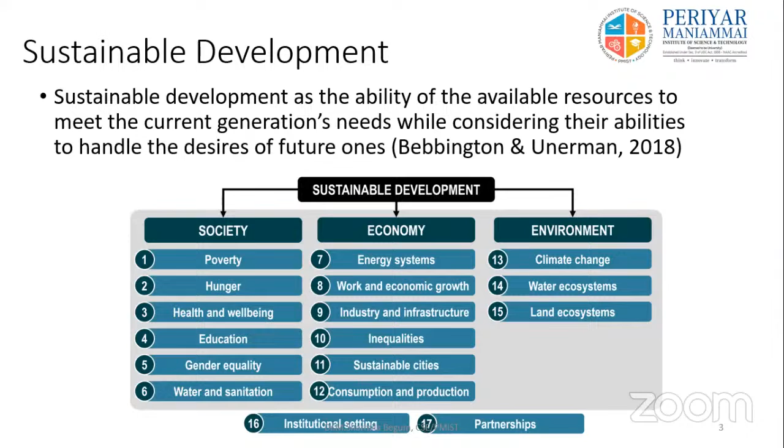So how can the computer science field be utilized in climate change, water ecosystems, land ecosystems, and how can we achieve economic growth and also improve society.

Computational sustainability - computing for a better world and sustainable future - we are formulating for these three needs: environmental, economic, and societal.

For the sustainable future, computer and information scientists are playing a role in good sustainability. Such computational expertise is needed - recently artificial intelligence, big data, machine learning, and various methodologies have turned into the IT, green IT environment.

Now the world's evolution, Industry 4.0, has turned into this. So we are now challenging ourselves to move toward the desired future using computer techniques. Thus, computational sustainability aims to identify, formalize, and provide solutions to computational problems, balancing societal needs with environmental and economic futures.

The major areas of computing where we can attain sustainability: the first is how computer architecture meets this need. Now we are moving into large data centers, like cloud environments, using recyclable components.

In the computing environment, there are various generations - now next generation 4G networks have come, and we are also using older access networks like local area networks, and now Wi-Fi.

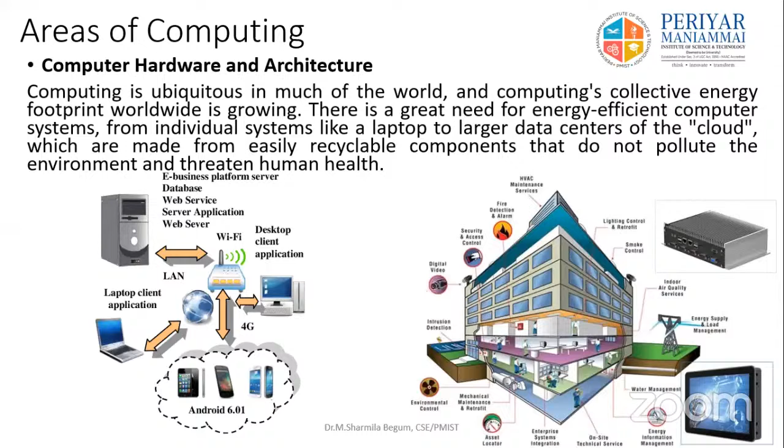The next area is robotics and sensors. This is a major area in computing sustainability we can address. Nowadays sensors play a major role, like Google Maps - geographical information systems we use for tracking and information.

Using that, all the information is retrieved, and sensors play major roles like monitoring civil infrastructures such as bridges and power grids, with sensors in a wide variety based on vision and audio. These sensing abilities help us respond to several disasters.

Nowadays robotics plays a major role. The robotic concept is nothing but how we can replicate the human brain system.

By replicating the human brain system, we will replace all manual work by the robotic concept. This is a major field in Industry 4.0. For this process, we have to study about sensors and remote sensing. We can place sensors and retrieve data through Internet of Things, that is IoT, and we can pull all the data into servers with a processing station. Collecting all this data, we will perform some analyzing.

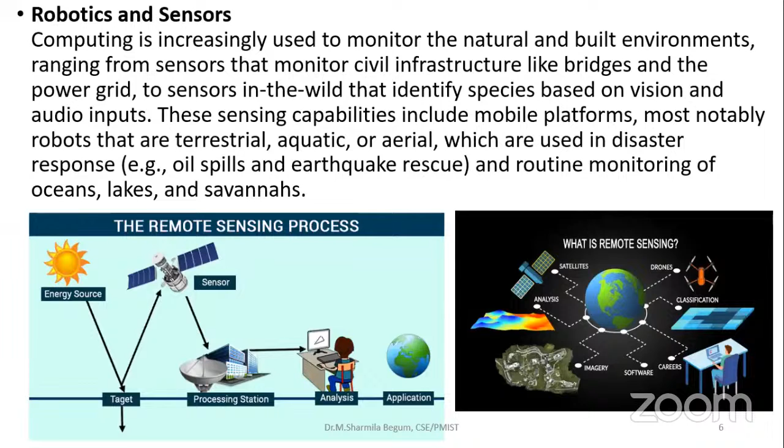The next area of computing is the cyber physical systems of recent Industry 4.0, CPS. We will perform computing technologies by embedding these cyber physical systems into various processes like inbuilt car systems, highway buildings, and also we can build smart homes or smart malls. This process is to majorly improve energy efficiency and also for safety purposes.

CPS will be helpful to monitor all the processes and data we have handled, and also it will intimate immediately to the users. Otherwise, the admin will get the response immediately by using the cyber physical systems. Here also human-built systems such as cars, airplanes, and robotic systems are used.

Some intelligent systems like artificial intelligence play a major role. As I told you, it will replicate the human brain, and we can use this artificial intelligence concept for sustainable development, reserving water usage with optimization. Intelligent systems use several machine learning algorithms, and with supporting algorithms we will perform and predict using intelligent software.

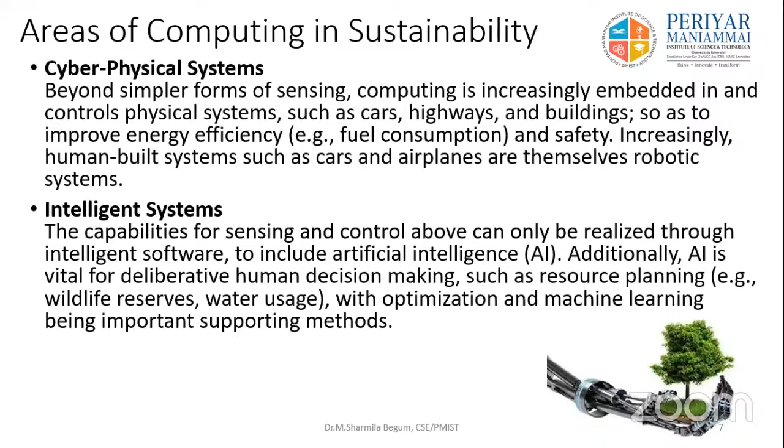So this is the main idea of cyber physical systems. Systematically, we are touching all kinds of sustainable development like social systems, enterprise systems, and biological systems. CPS plays a major role.

In cyber physical systems, it will be able to develop mechanical, optical, or electrical systems, and by using this system we can cover all the sustainability in the community of education, healthcare, and government. We can also perform several models for business, and the business model can be used for analytics and prediction for the future.

In several healthcare systems also the cyber physical system is implemented. So these are the industrial revolutions, and CPS plays a major area of computing sustainability.

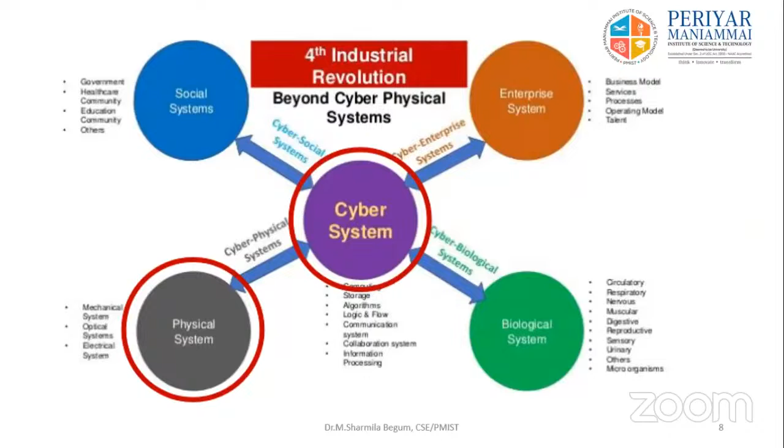The next field in computing that we are all using nowadays is social computing and networking. In this discipline, we are performing several e-commerce activities and online recycling of cooperatives, and this is ecologically sustainable for the environment.

We are minimizing our manpower and paperwork, and we are using several social media platforms, performing video lectures and video conferencing through social media computing, and also using several networking concepts to connect all the people around the world.

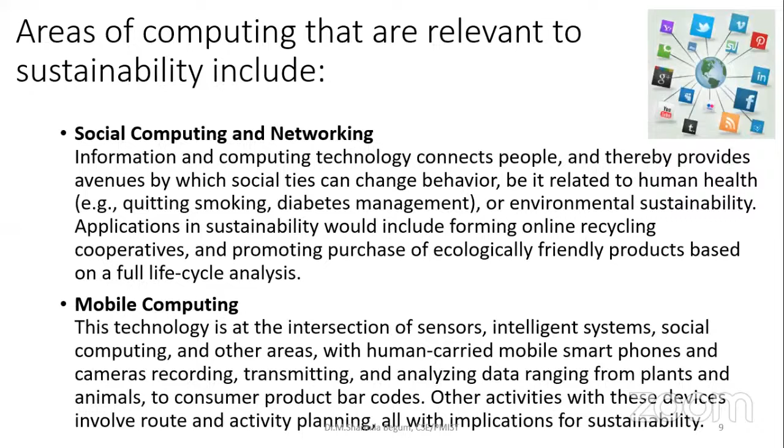The next step to develop sustainability is mobile computing, where we are recording information, transmitting our data, analyzing the data, and using it for sustainable products. Also, nowadays consumer product barcodes are implemented using the mobile computing concept. This all implicates sustainable development.

So these are all the various areas where we can touch sustainability development in the computing field, using the concepts of cloud, social networking, social computing and networking, and mainly the fields of artificial intelligence and machine learning. The next sustainable development is in the energy and environment factor.

These facilities allow us to apply products which increase and decrease environmental impacts. That is, we can apply computer technologies to determine how we can save for future desired needs.

So nowadays we are using technology to eliminate the need of paper, conserving our energy, and enabling several products. This will help determine and minimize the waste by using these strategies of computing technologies.

Nowadays we have options by using Google Docs, that is Google Document Viewer, and we are creating documents in place, and we are sharing the documents in any place.

Receive the document, and they will edit the document. The entire community will view the data placed in Google. So this Google Docs and video conference aspect, and paperless works, are the main factors in the computing field.

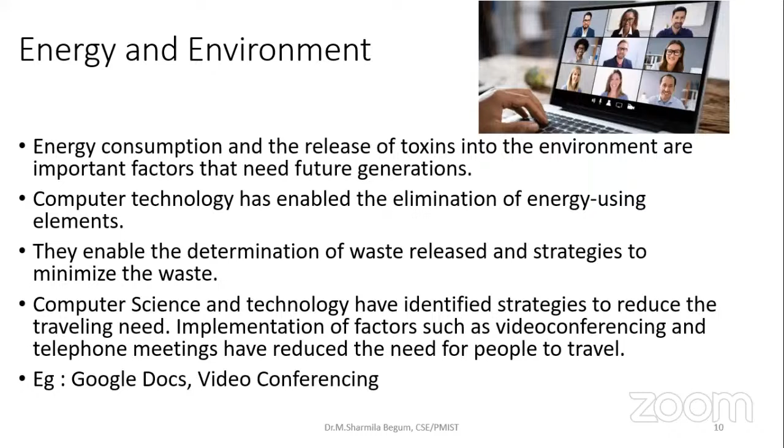So these are all the main environment factors that are needed for future generations.

The role of ICT is playing out in various forums like marketing, education, health, and environmental sustainability.

In the marketing field, by applying classification or training algorithms, we are classifying how things will be tomorrow. This will increase the accessing of market information. In terms of education, we are providing availability of quality educational materials and several resources through ICTs.

In terms of healthcare management systems, we are providing e-health through various ICT tools, enhancing the delivery of basic needs and services through ICT tools. Environmental sustainability is also playing a major role by using information technology.

So the next one I'm focusing on here is IT for green. This means we are replacing non-green services with green services. This process can be called computing for sustainability.

Computer science will benefit the environment with less carbon control, and also better consumption of resources like fuel, and we can give better agricultural output. So we are producing that — how we can give services with green services is the IT for green technologies.

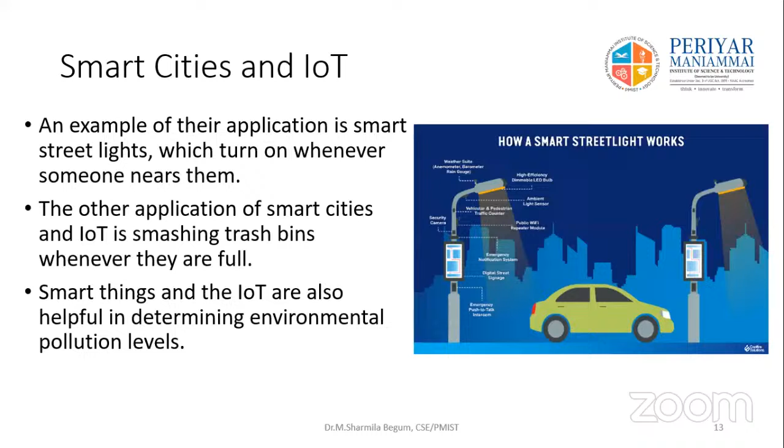So this is the major field, Industry revolution 4.0. We are able to store and retrieve the data with a less polluted environment.

So this computational sustainability we can achieve by using IoT, performing several computational strategies like visualizing the data, learning from data, and predicting the data for large amounts of information.

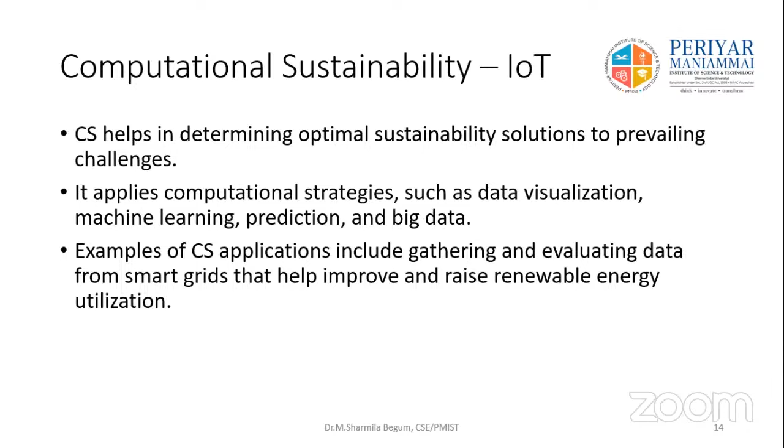And we can determine the solution.

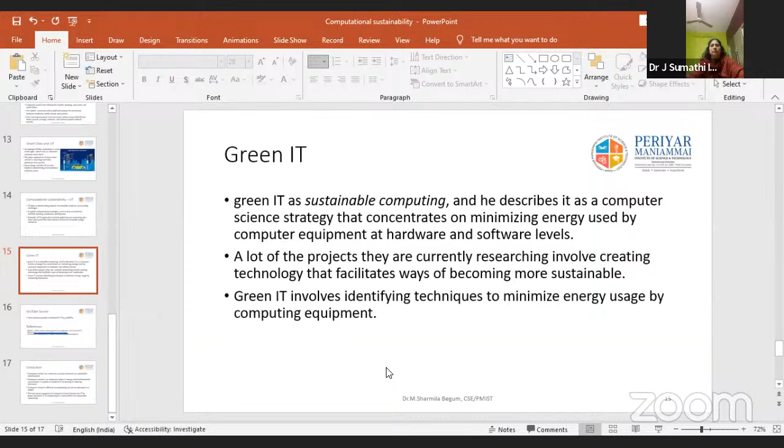We'll share this one through the chat box, Santosh. We will see it later.

So by using computing techniques like green IT, artificial intelligence, robotics, and remote sensing concepts, we can achieve a number of positive outcomes in sustainable development. So this will be important, sir.

Please continue with a louder voice. Green IT is an important player in energy and environmental conservation, and also has numerous positive outcomes on sustainable development. So by using green IT, computing will be used for sustainability and sustainable computing.

And combining non-green services with green services, green IT involves identifying techniques to minimize energy usage through computing.

These are all several fields we can use through the Industry 4.0 revolution. So I have pointed out a lot of techniques like teleconferencing, artificial intelligence, machine learning, robotics, and green IT, combining non-green services with green services, along with machine learning algorithms and remote sensing processes in SaaS.

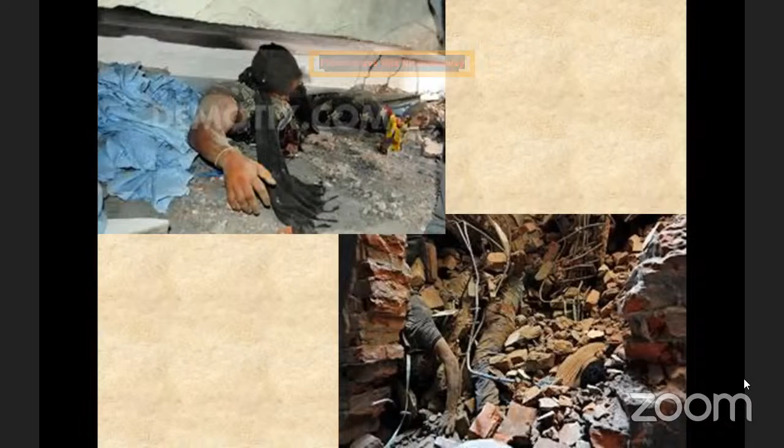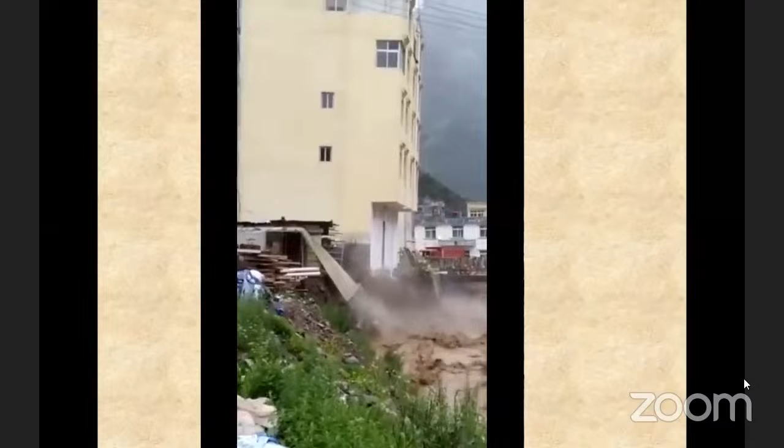See, some hands are towards us only, so fingers point back at us. Everywhere we have the local planning authority, DTCP approval, everything in place, but are we following properly? Particularly on the roadside, the road is 23 or 30 feet wide, but on both sides, houses are constructed with ramps of at least 5 or 6 feet. In a 23 feet road, if both sides have a 5 feet ramp, we finally get only 13 feet. So who is to blame, the approving authority or whoever is constructing the building?

These are some of the videos. This image was taken in May, June, July, August, September, but after January, after Pongal, this is the condition. So in one period we are suffering due to flood, and in another part of the year we are suffering due to drought. So in both ways we are suffering.

This is the big video, next one. Every year we are facing various types of cyclones. We are beautifully naming the cyclone, like naming our child. But whether we have planned to prevent people, infrastructure, or animals from the cyclone, every year we only get remedy from the government after the cyclone. We are not following any rules.

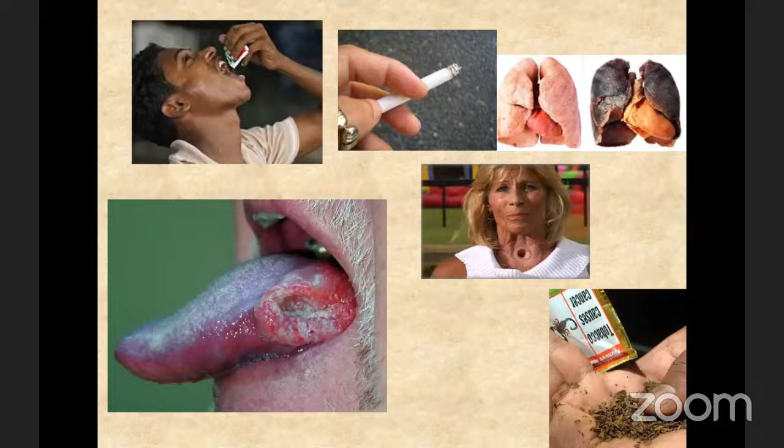We are not thinking, not bothering about it, but we are always blaming someone. Everyone, particularly in burning plastic, we have to educate people not to burn plastic or any solid waste material, because burning solid waste will develop particulate matter. Particulate matter 2.5, 10, everything. This morning our Santhosh addressed various aspects, but regarding the effect of particulate matter 2.5 and 10, that is why we wear masks.

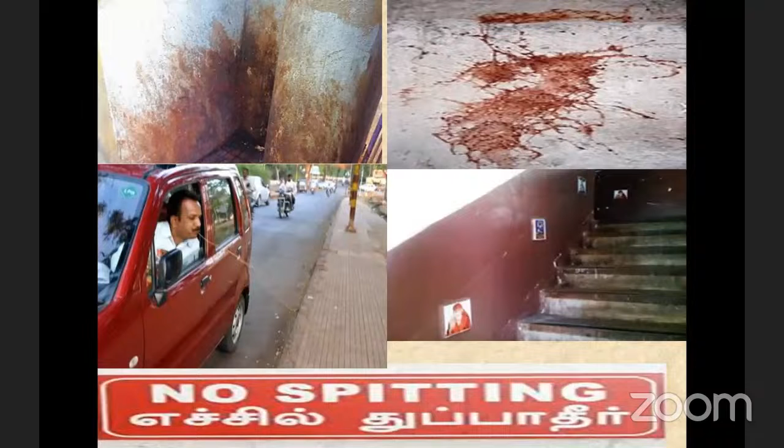So these are images taken from our bus stand, Tanjavur bus stand, a leading theater in old Tanjavur bus stand, another staircase in the shopping mall. This one was collected from a person spitting near the platform, taken from the website. But all three images were taken from our own soil, in Tanjavur, various places.

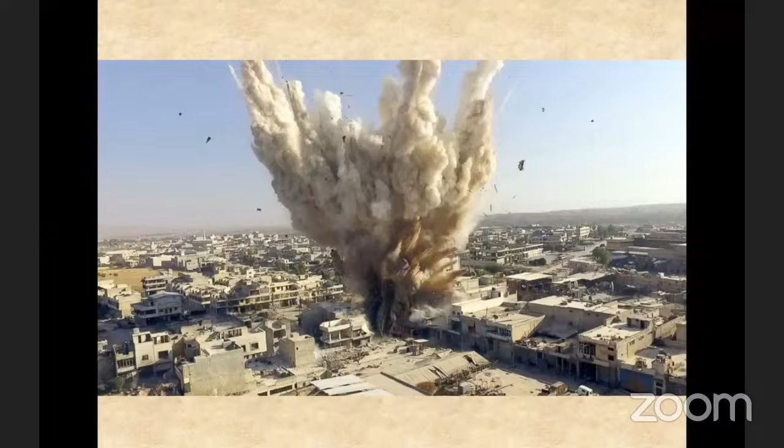Always the bike is invented to travel at the speed of 120 with 3 members sitting on the bike. Finally, we are traveling in the 108 ambulance towards the hospital. There is a pathetic condition everywhere we are missing. So this is a terrorism. Even in a civilized society, we are claiming that we are a civilized society.

Still, we have threats due to various weapons, and this is our Tamil Nadu, India, even Tanjavur - we are claiming this is an open defecation free district, open defecation free state, open defecation free India. But what is the original actual condition? Can you go walking in the early morning at 6 o'clock or 7 o'clock - everybody witnesses what is happening in and around. So these are the various questions I am raising, not only for you, also for me.

Finally, my answer - I have one small, very simple answer. Every citizen of India has to follow professional ethics, or simply ethics. If you follow the ethics, we can avoid everything. That is my question, my answer. But what about yours? I don't know. You please get the answer for yourself. So this is the next one.

Now we enter into the actual subject - that is sustainable construction and green certification. So why sustainable construction? Sustainability is everywhere, but particularly in construction, if you follow sustainability conditions, sustainability technology, or sustainable construction materials and methods with various details, definitely you can save.

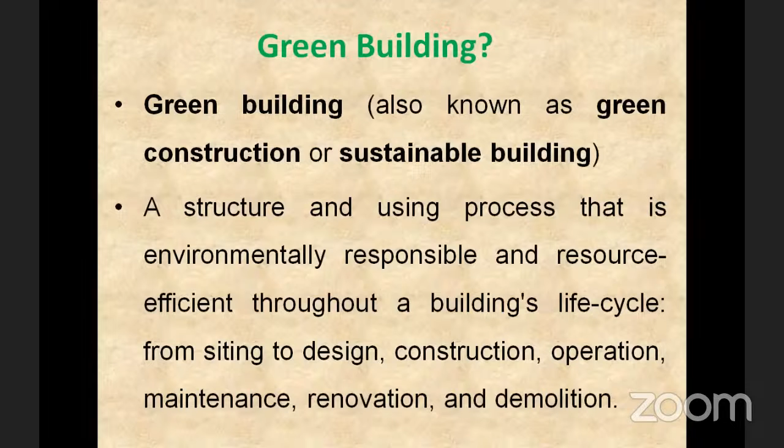So during the design, during the construction, during the operation, during the maintenance, renovation, demolition, that is the life cycle of the building. So during the life cycle of any building, it may be houses or bridges or roads or any multi-story shopping complexes or commercial buildings, anything we can follow.

So the green building concept in India, particularly almost 24 countries all over the world, they are following various norms, particularly the US Green Building Council. That is the foremost agency responsible for the green building concept. Following the US Green Building Council, we are having Indian Green Building Council, IGBC.

So in India we are following 2 types of green building rating systems. One is LEED India statement, LEED India rating system. It is governed by Confederation of Indian Industries under the Indian Green Building Council. Then GRIHA, that is the Green Rating for Integrated Habitat Assessment. The LEED India statement is for any building, but GRIHA is mostly used for any habitat or cluster formation, developed by TERI, controlled by CII. This is by TERI, that is Energy and Research Institute.

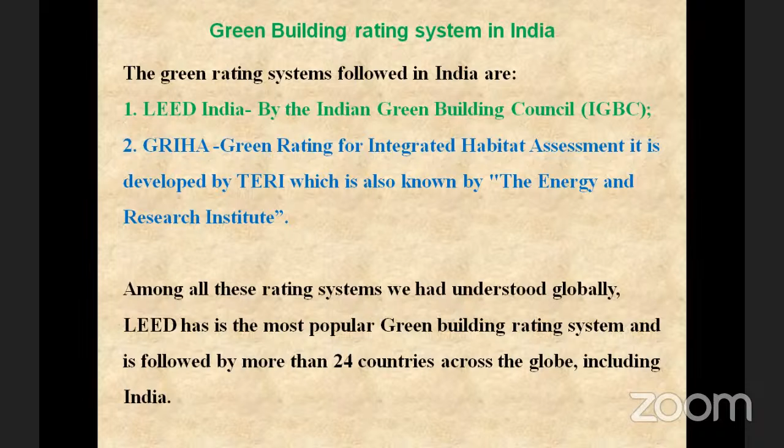So even though LEED or GRIHA, the concept or the content or technology or practice is almost the same. The green building rating system globally is now mandatory. In developed countries, every building is controlled by green building councils, particularly the rating system, the green building standards, particularly LEED. LEED means Leadership in Energy and Environmental Design.

So with a lot of parameters I am going to show, through this we are controlling the various environmental systems. Then green globes, model green home building guidelines, then build green, energy star, living building. So energy star and LEED are very famous everywhere. Compared to LEED, there is the energy star.

So if you go to a shopping place to purchase an AC or any electrical or electronic gadgets, immediately the seller says, this is our 3-star rated sir, this is 5-star rated sir, this is a single star rated. Even that has an inbuilt stabilizer, everything they are selling that.

Nowadays all electronic gadgets are coming with inbuilt inverter, but still our educated people are confused whether the inverted AC is useful or non-useful. But technically it is correct. The inbuilt inverter is guiding us for proper fluctuation of power and consumes less energy, less power, so we can save more energy, particularly electric power. So please always use star rated electrical or electronic gadgets.

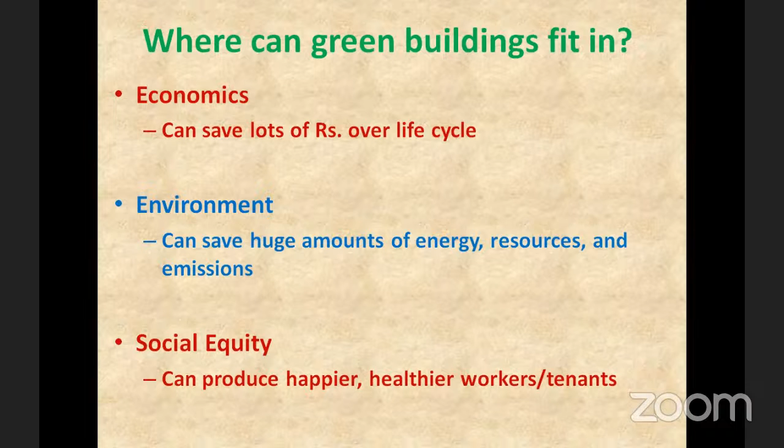Then social equity - we can produce socially, economically equalization at all levels, a healthier working system, working environment for workers and tenants. As I mentioned earlier, we can save 30% of the money or material or machinery or gadgets, whatever the name. Using passive and active energy and environment, we can save a lot, about 30%.

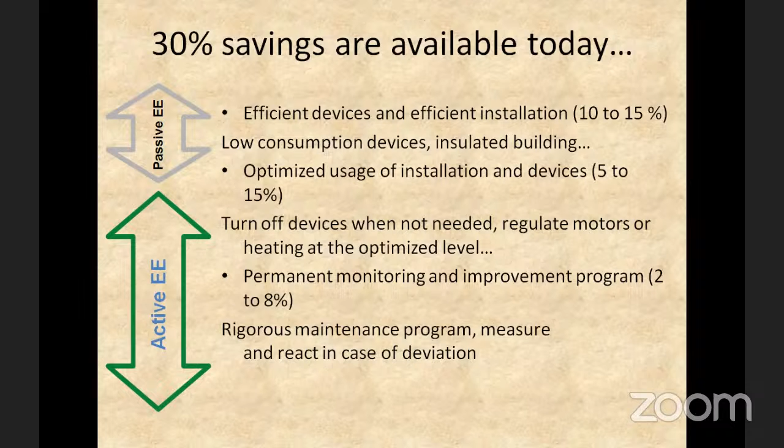That is the various ways, either directly or indirectly, we can save. That is very, very important. The 30% is the average; even maximum we can save 40%. That is very, very important. So what are the opportunities in saving? Energy infrastructure, information technology.

In the last session, Madam Sharmila addressed the various IT, ICT, and cyber security related sustainability concepts, but everything can be incorporated in buildings. Now for example, our Rameswaram properly constructed buildings with sensors and screens, with proper maintenance throughout the year - everything is now totally fixed with a lot of ICT gadgets. The government monitors the performance 24 hours, and if any defects occur, it is monitored by our government officers or CPWD people. That is the important role of ICT gadgets in a building.

That is called the intelligent energy efficient building.

So energy infrastructure means fixing during the design, during the construction, during the maintenance, we are following all the green building concept, using all the green building materials, construction technology, everything. Similarly, the building should be monitored or used by using ICT facilities. That is called the intelligent building.

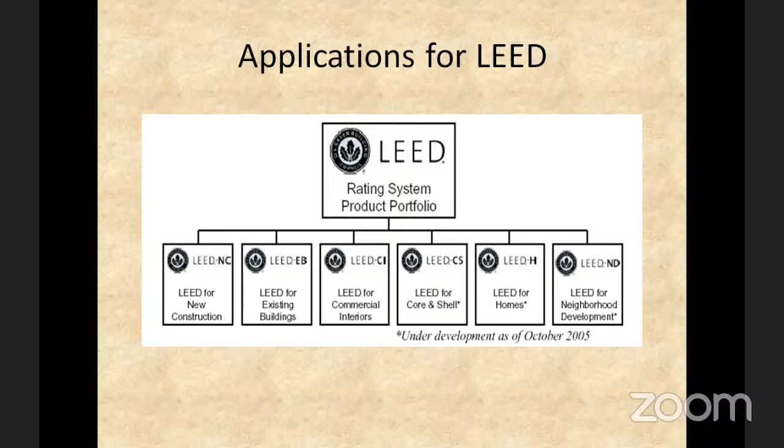So why is this needed? Already I am explaining - the built environment accounts for almost 40% of the global consumption of raw material only for construction. 37% of the primary energy is consumed by the construction industry. 68% of the electricity is consumed by the construction industry. 12% of the water, particularly potable water, is consumed by our construction industry. 40% of the waste stream, and 35% of the carbon dioxide emission, only from the construction industry.

See the quantum - after agriculture, the built infrastructure sector is a very big industry, consuming more energy and emitting more emissions. So it is very important that we follow the LEED standards or green building concept for infrastructure or buildings, because that is why the government is also very particular on standardizing building practices and regularizing the building construction norms.

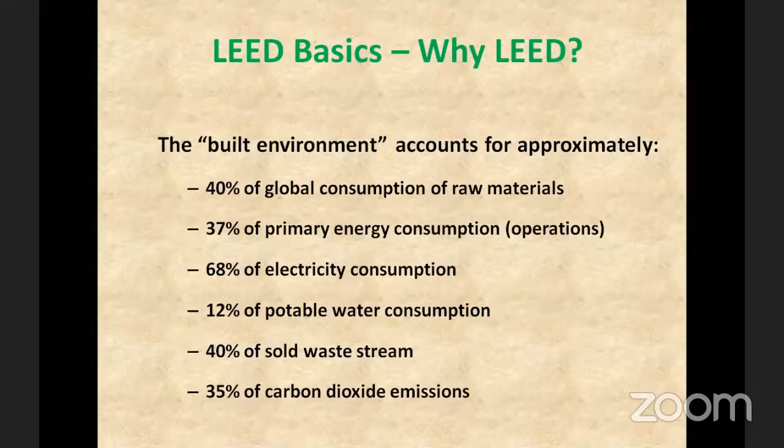Now day by day our local planning authority, or the town and country planning authority, they are modifying the rules and regulations for any approval. That is because this is the quantum of energy or pollution by the construction industry, next to our agricultural industry.

Then what is the need of LEED? To investigate the feasibility of building a cost-effective, sustainable home. Sustainability means not only emission reduction, but also increasing the comfortability for the living people. It is very important, that economical condition, economical sustainability.

So reduction of cost. Some of the people are there, low cost construction - please don't ask low cost construction. It is not low cost construction, it is cost effective construction. When the term low cost construction is misleading the people, they are thinking that by reducing the cost, we are reducing the strength of the building also.

Please change your mindset, everybody. Low cost construction, it is not the correct word. It's cost effective construction, cost effective sustainable construction. It is reducing the cost, not reducing the performance or strength of the building, any building. So I request all the participants hereafter use cost effective construction. Still people are using low cost construction, even our civil engineers also.

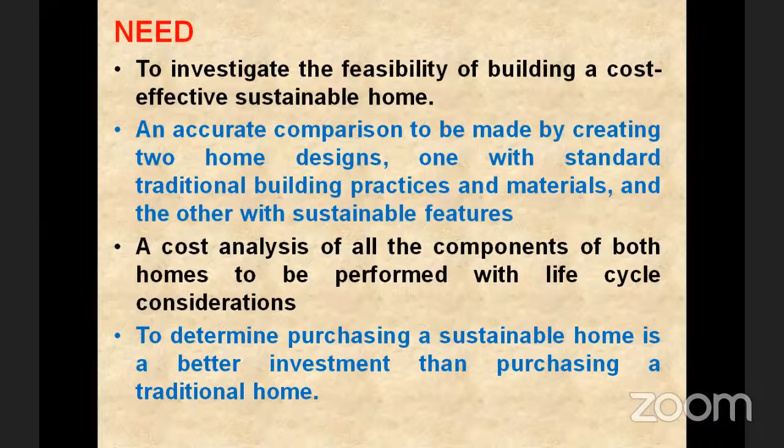Green buildings are becoming increasingly common for both residential and commercial structures. At one time, people considered the green building concept only for residential structures, but now the condition has totally changed. Most of the commercial buildings now go towards the sustainable concept, because they have to attract more people for working as well as for any commercial purpose. So they are also now going for green building rating.

Then there is high demand for green design from greater overall consciousness for the environment and sustainability. So now,

due to various calamities, pandemic or epidemic and various natural calamities, even man-made - I tell that mostly we are escaping by naming it a natural calamity. But my consideration is, all the calamities are made by human beings. Either flood or drought, it is only because of the mistake of human beings. But everything, so that is why

I'm always telling that everything is man-made calamities. There is no natural calamity. We are constructing buildings along the water course. During the flood, we are blaming the rain, or any government, or local body officers, office bearers. So it's the building causing any calamities.

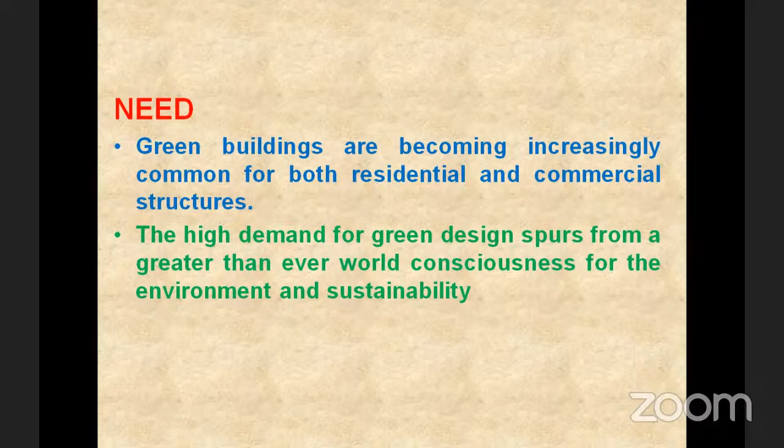So then why should you get LEED certification particularly for any building? If you get the LEED certification for your infrastructure, it contributes to a healthier work environment, higher productivity, and comfort for the workers and tenants. That is very, very important.

It will attract more workers - not only more workers, good workers, productive workers, or smart workers. Particularly now, more than productive workers, we need smart workers, because it is the smart world.

We need smart workers. If you have LEED certification, you can attract more smart workers, and from them we get more productivity and enhanced asset value over time. Particularly in work efficiency, not just the efficiency of the workers, but the efficiency of the equipment is more important than anything else.

By using LEED standards, you can increase the efficiency of all machinery. We can increase the lifespan of any machinery and increase its productivity, getting more benefit from it. Maintenance-free applies not only to buildings but also to equipment and machinery, so we can reduce the maintenance cost.

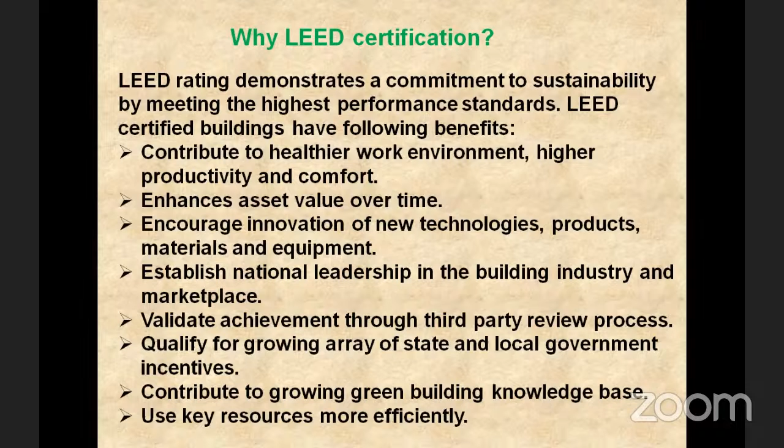In LEED certification, anybody can get certified, not only big industries, big buildings, or commercial sectors, but even a small house with 2 bedrooms, 1 kitchen, 1 hall can get LEED certification. That is very important.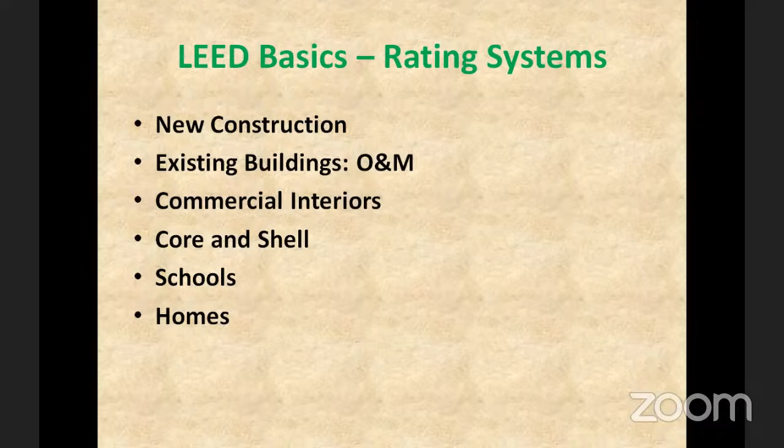Then there are ratings for commercial interiors, core and shell, and schools. As I mentioned in the last slide, they have now incorporated schools also into the rating system, and finally homes, including individual homes.

So what is the LEED India category for the rating system? The following 6 categories you have to concentrate on to get the rating, whether for new construction, existing construction, or other buildings as mentioned in the last slide. You have to apply your mind or ideas to these 6 categories.

One is sustainable site. During site selection itself, you have to follow all the norms. For example, if your site has any water body or green trees, you should not remove the trees—either replace them or don't disturb them. Similarly, water bodies or water courses should not be disturbed.

Then water efficiency. You have to use all the liquid waste within the premises itself—clean the water, or otherwise process it using a water purification system. We have a lot of water purification systems available now that we have to follow.

Then effectively you need zero water waste—that is a very important one. Zero energy waste and zero water waste are big achievements you have to follow. Then energy and atmosphere: your building should be constructed on par with the local atmosphere.

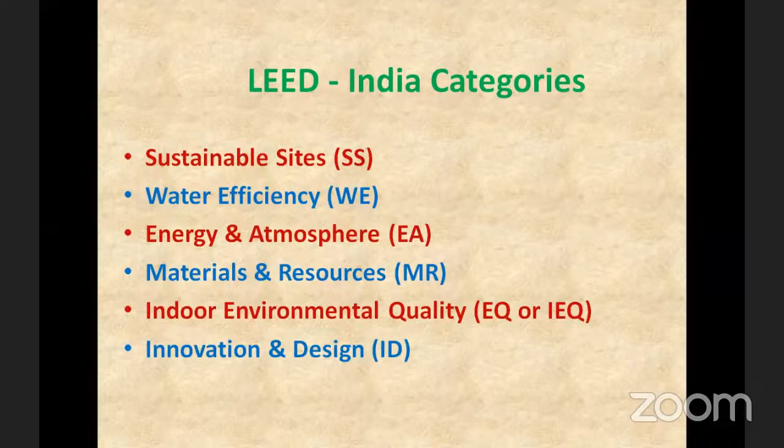Then innovation and design for construction, construction practices, construction equipment, everything. These are the major six detailed categories we have to concentrate on during construction or anything to get the certification.

So the first one is sustainable sites. This includes site selection, density and connectivity, which is called the neighborhood concept. Then brownfield redevelopment and alternative transportation systems. In the existing system, if you create more dust, noise, pollution, or emissions, we have to find an alternate transportation system.

Similarly, site development, whether it is habitat or open space, we have to follow the proper norms for everything. And then stormwater control—that is why Bangalore is now suffering a lot of flooding. Similarly, a few years back our Chennai also suffered. So stormwater control, then reduction of heat island effect.

Heat island effect means some places get more heat due to an increase in heat in a small pocket. It creates a vacuum due to upward movement of hot air. We get the vacuum, it creates this effect—how to concentrate on the heat island system.

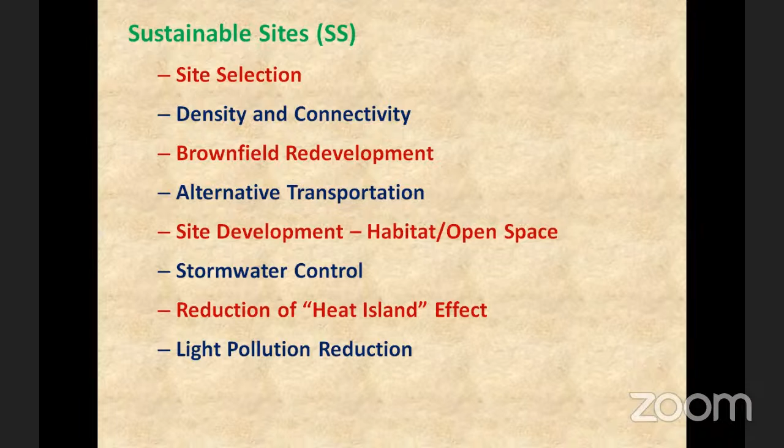Similarly, we concentrate on solid waste, liquid waste, noise pollution, and everything. But what about light pollution? It is another major polluting factor, creating nuisance due to light. But without bothering about anybody, we are polluting in the form of light. So that is another factor of local sustainable sites.

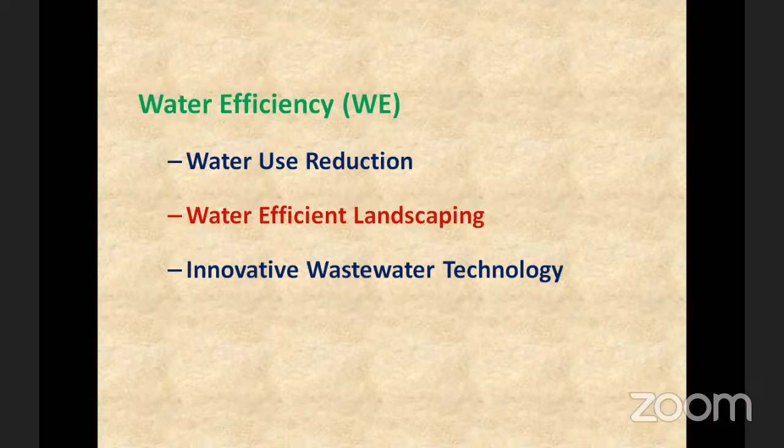Then water efficiency: reduction, reuse, recovery—that is very, very important. We have to reduce the usage of water, recover the used water as reusable water, and recover the water generally. So water efficient landscaping and innovative wastewater treatment technologies are the basic requirements for water efficiency.

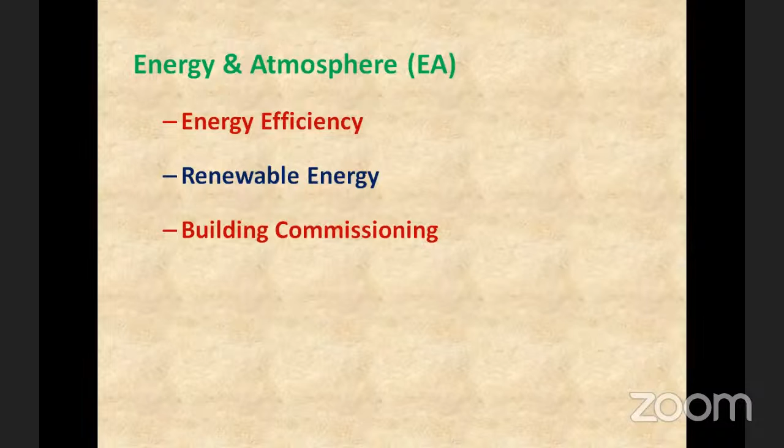Then energy and atmosphere: energy efficiency and renewable energy, then building commissioning. These are the three more important factors, in addition to smaller factors. So renewable energy, building commissioning, everything has already been discussed—energy and consumption. Then material resources.

So building reuse, construction waste management—that is now a very big problem. If you go along the NH, you can see a lot of waste, construction and demolition waste, on both sides of the road, particularly near the flyovers. So all the flyovers seem constructed not for the passengers, but to dump building waste.

Then material use, building reuse, material reuse, similarly recycled materials, and then regional materials. Why do we use regional material? Transportation consumes most of the energy for material transport, for material or equipment, everything. So we have to use regionally developed or regionally produced regional material.

Then rapidly renewable material—like renewable energy, the material should be used as a renewable material. Then certified wood: for wood, there is also some certification, rating, everything. So when we are purchasing, we have to ask for the certification of the wood. Certification of the wood is very, very important.

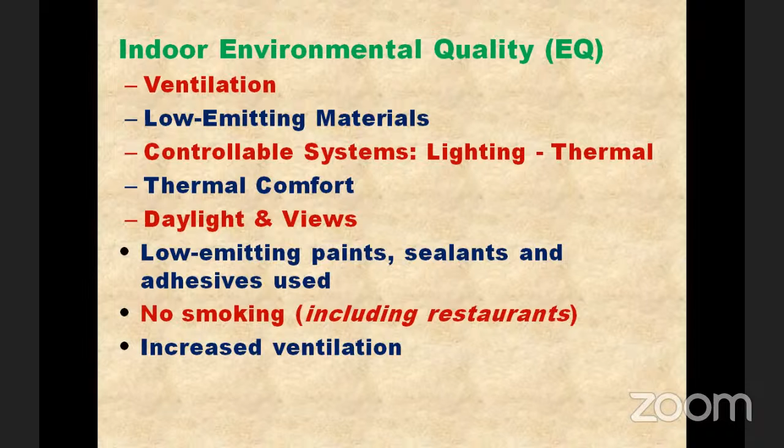So the indoor environmental quality only controls the lifespan. Otherwise, during maintenance or during the usage life cycle, the indoor environmental quality is the major factor controlling our environmental condition or sustainability condition of the building. Because if the indoor environmental quality is very good or very high, the consumption of energy, consumption of water, consumption of anything is very, very less. We can get more productivity, more comfort inside the building. Definitely the indoor air quality monitoring, indoor environmental quality improvement, that is a very, very important one.

Building design to be included. So these are the various factors. Already in this category, we have to concentrate during the design.

So building and site program, building form and geometry. In architect design, any planning by architect, they concentrate more on the lighting system and ventilation system. That is very, very important. So from the form and geometry, a building can improve the indoor air quality or indoor environmental quality only by form and geometry. That is very, very important. More than construction, more than site preparation or anything, the form of the building and geometry of the building is the major factor deciding the indoor environmental quality.

Then building envelope and facade treatments. Particularly the facade should not be plain, particularly on the east and west sides, the wall should not be very plain. It will attract more heat and transfer it inside the building. So particularly on the east side and west side, walls should have various panels or undulations, depressed or projected portions. Then only it can increase shade over the building and reduce heat transmission.

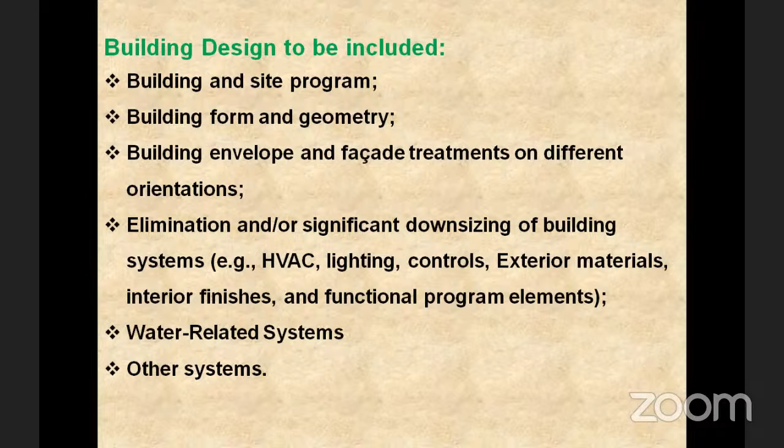Then sustainable practices include design modification, material production, material transportation, resource efficiency, the selection of material - these we already discussed a lot. Then selection of material that is environmental, natural materials, alternative energy resources we have to follow in all buildings. Then alternative construction equipment and fuel resources we have to identify.

Methods for complying with government regulation - that is very pathetic in our construction industry. We follow the regulation only for getting approval from the authority. During construction, we simply throw out all the regulations and norms, but I request that at least ethically you follow the government regulation. These government regulations are not for the government, they are only for us.

Then supplier and vendor social responsibility - this is another important why, social responsibility of the vendor or supplier. They have to sell only star rated materials or environmental friendly materials or sustainable materials. We have to select the vendor, supplier or service provider only among those who have social responsibility and environmental responsibility, those handling environmentally friendly materials and equipment. We have to encourage people who concentrate more on socially responsible activities like environmental friendly material sellers.

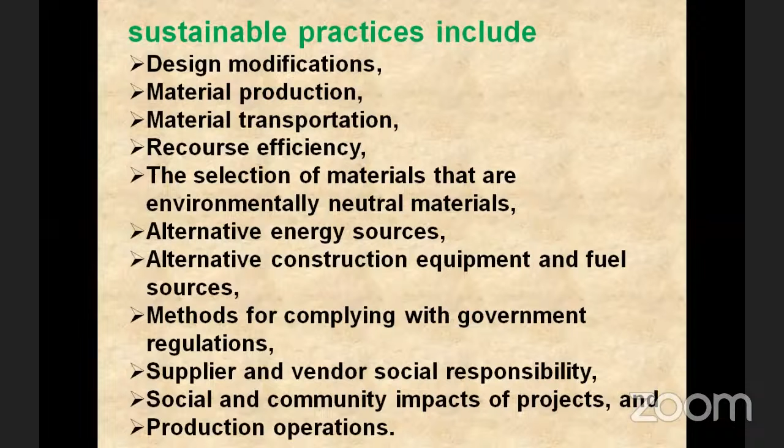Then social and community impact of projects and production operation. So after construction, during production or during construction, during maintenance or during occupation, we have to consider this. Then current practice - what are the current rating systems that they are following.

Environmental impact and environmental impact statement - that is why we are getting the environmental impact assessment or environmental clearance from the pollution control board. So that is a major import.

Then social and community impact of the project. We have to find out not only the feasibility, but also study the impact - social impact in the neighborhood and community impact or economical impact. Everything we have to study during the project.

Then supplier and vendor environmental social responsibility we have to identify, including responsible supply chain and procurement, reducing the energy consumption during the construction. Then renewable energy sustainable design during the planning and design, material cradle to grave ecological cost, including whether materials are reused or recycled, and reducing energy use during the manufacturing.

That is called embodied energy. You have to select, as a responsible citizen, the material consuming less energy or less embodied energy. That is very important, not only for construction - from cradle to grave you have to follow the ethics. Then environmental impact, production operation, environmental footprint structures.

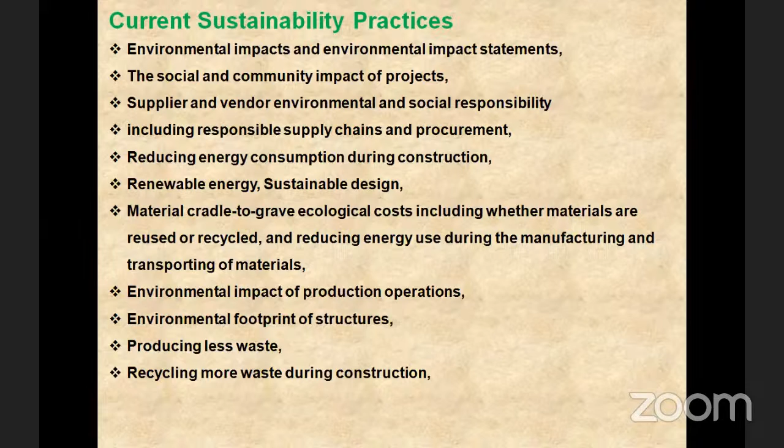Using reusable material, producing material, reusing material - but it is very pathetic that the reuse of demolition waste is very less. I request all the participants, please try to use the demolition waste during your construction, even after the project also, everything.

Then what are the various processes for the evaluation of the sustainability of the structure? These are some points you have to get awareness about. Those who are having interest, please write: layout of structure, material ordering, delivery, everything.

Plan for post-construction site restoration, transportation, waste management, energy management during construction, material and resources selection, procurement, perform life cycle cost assessment for materials and equipment, investigate alternative sustainable materials and practices, investigate alternatives for material deliveries, and lean construction. But please concentrate on what I am trying to tell.

Lean construction, lean practice is very, very essential nowadays. You can hear about additive manufacturing, 3D printing. Now even the building can be printed, like printing or molding toys or molding any equipment, molding a part using the CNC machine. Now we can build a building with a 3D printing machine. So lean construction or frugal engineering or sustainable building - all are almost the same.

What is lean construction? So lean construction is very, very important. That is not only lean construction - lean engineering is applicable for all engineering and non-engineering professionals.

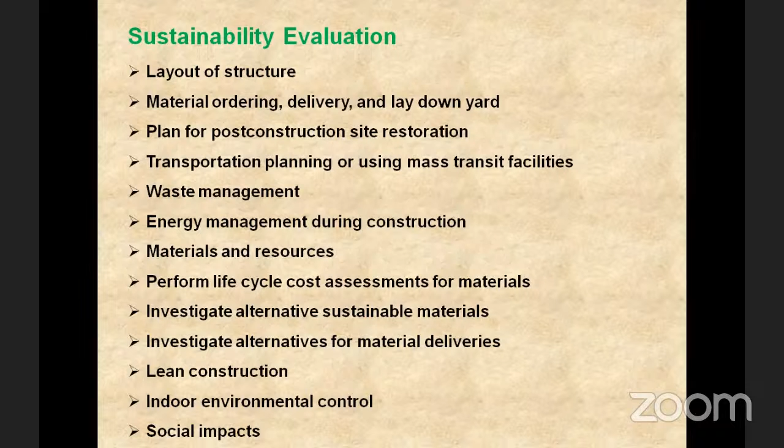So that is environmental control, social - these are the various materials. Now aerated concrete - people are hesitant to use aerated lightweight concrete, but it is only lightweight, not less strength. Please keep in your mind that it is a very good material.

It is produced using waste material like fly ash or quarry dust. So people, those who are here, please use lightweight aerated AAC blocks or any other lightweight block material, because it's totally produced from waste. So it is having more strength - not less weight, less strength - it is having enough strength.

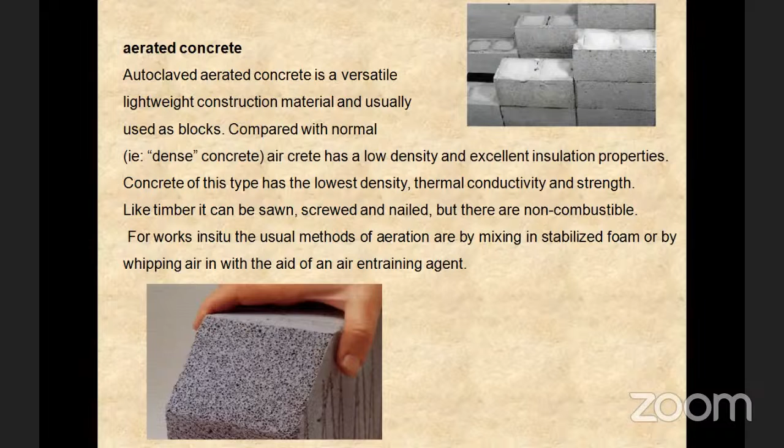People, even civil engineers, are now blaming the lightweight material. It is not due to the lightweight block - it is due to your construction practice. So you should allow skilled labor for the construction. Water consumption, everything is already energy efficient.

These are the points of the rating system. So to get certified, you have to score 50 to 59 out of 100 points. For tenant occupied buildings, also 50 to 59. So this is a good practice - only then do you get the certification. It is green building or LEED certified buildings. For the certification, you get only up to 59 points out of 100 points.

But if you want to get silver certification, you need 60 and up. Then for gold certification, you need 70 to 79. Then platinum is 80 to 89, super platinum is 90 to 100. So for global leadership, you have to get the super platinum certification - for that you need at least 90 points out of 100.

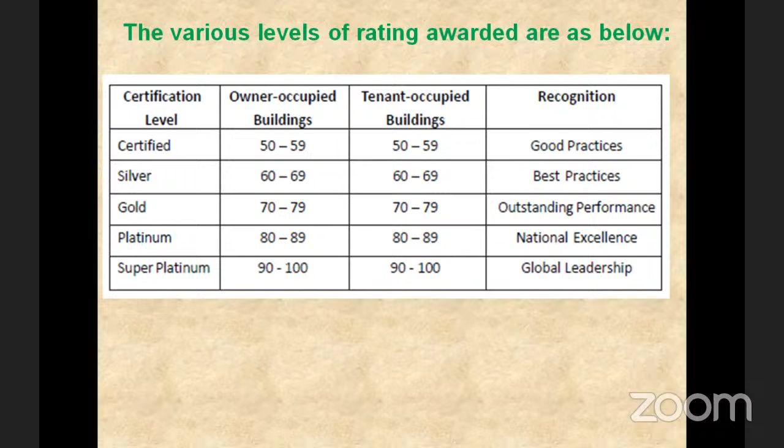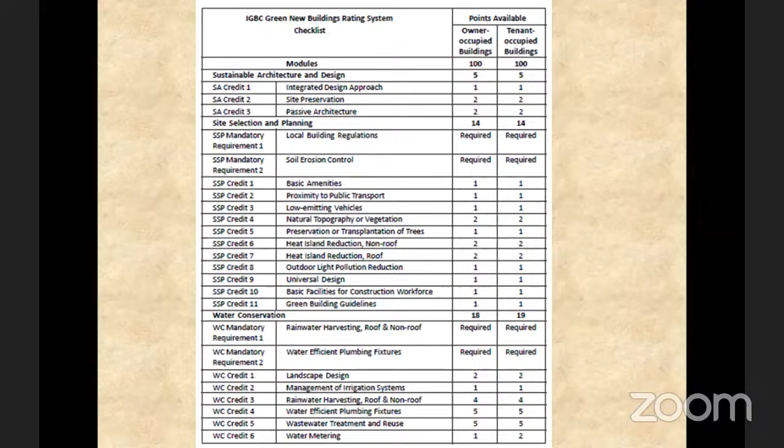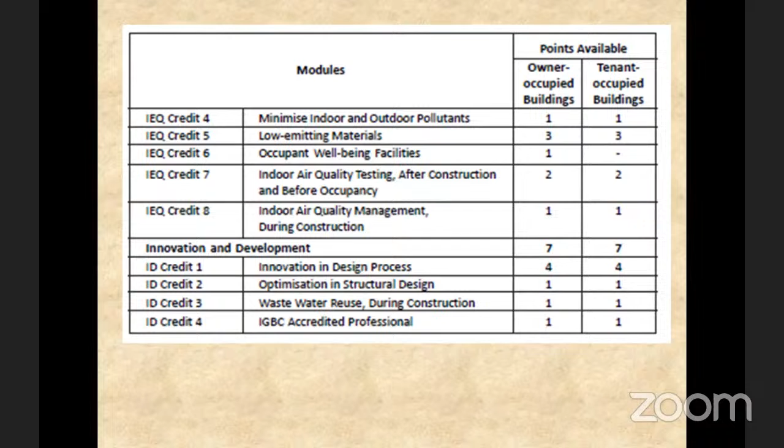So these are the various subdivisions of the points, 100 points. So yes, see, this is totally 100 points. The 100 points are divided into various categories, various subdivisions, sub-themes. Everything is available on the Indian Green Building Council website, or if you simply search Indian Green Building categories or LEED category, it is available.

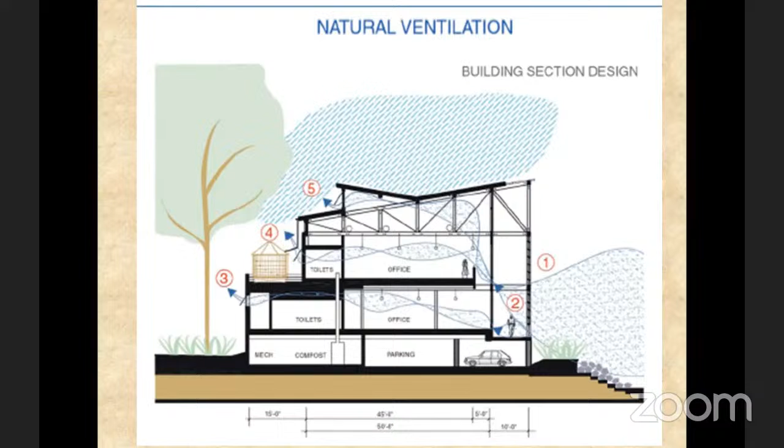Please go through this building life cycle, which we already covered. I told you this is not a green building, this is the green building. So if you use energy gadgets, energy efficient materials, energy efficient construction practices, see the natural ventilation in this building. During the day and night, we can simply avoid the AC, and we can even avoid the fan, if you properly allow the hot air to escape.

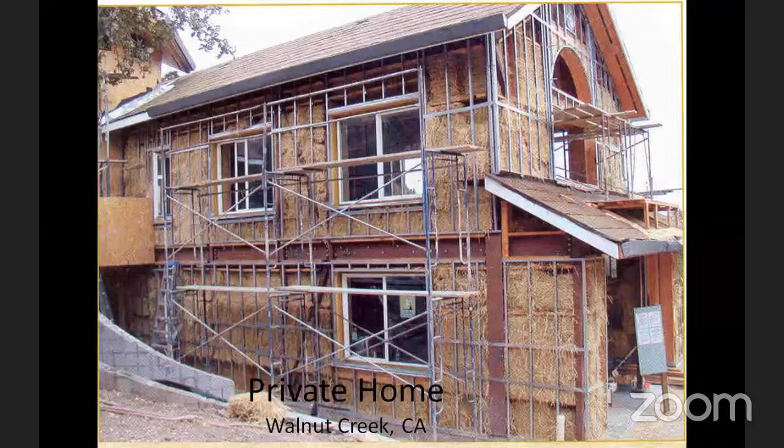That is the indoor air quality system, or indoor environmental system. See the lighting system, see the green building materials, various materials. So buildings are constructed, whether a private home or government building.

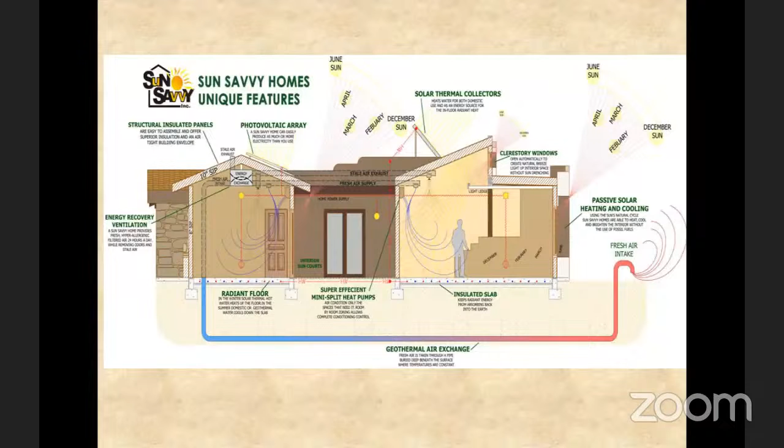These are the systems we now have to follow. This is a case study, some case studies. If you want the slide, I will send it. You can see how a building is constructed with this.

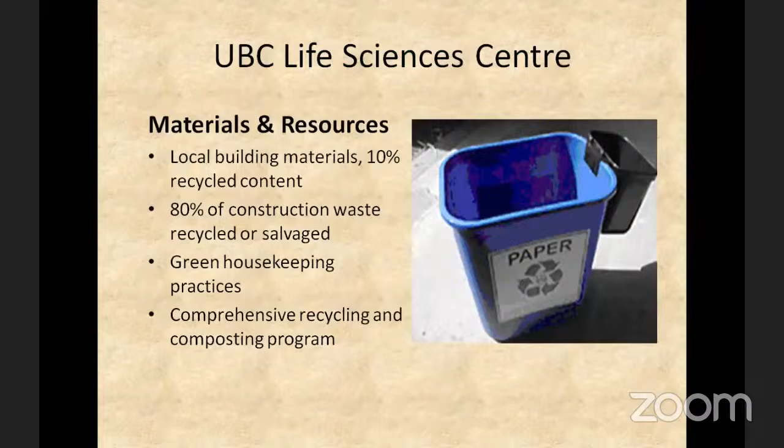So I request once again, as a civil engineer, as a responsible citizen, I am requesting all the participants: in your day-to-day life, please don't waste, don't consume more energy related materials, don't use more energy consuming gadgets. Simply don't waste. That is my humble request.

Everyone, you have to follow 2 dustbins in your home, one for non-degradable waste, one for degradable waste. Use the degradable waste for your gardens, kitchen garden. Use the non-degradable waste as a resource to get money. Similarly, use solar gadgets and everything.

I thank you. If you have any queries, you are welcome. Otherwise, it's already been a very long time. So thank you very much.

Thank you, sir. Thank you, sir. Sir, any queries? Any doubt from the engineers, sir? I think it's a very long presentation, sir, but very nice. Rather boring, as sir said now. No, it's not boring, sir, everyone should know this. It is the best waste management and energy management. Everyone should know this, sir. They should practice these things, sir. Thank you, sir, and please close the presentation, sir.